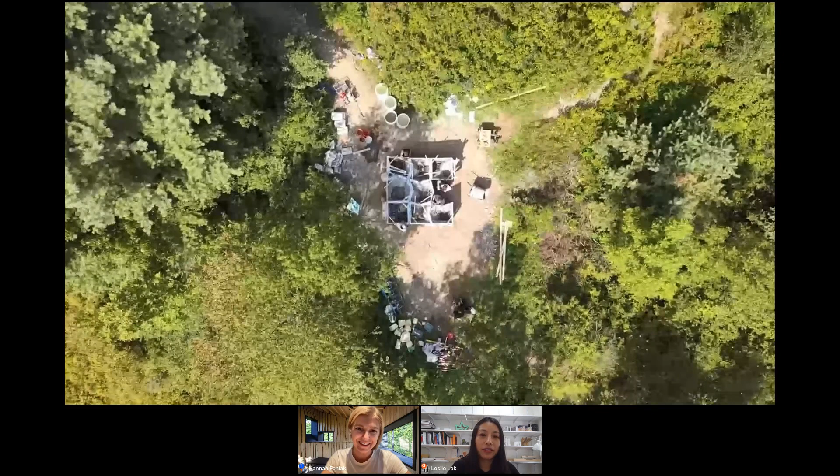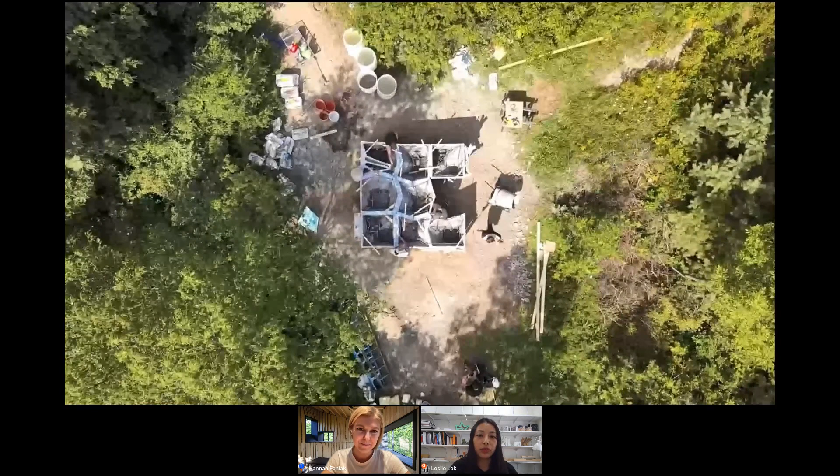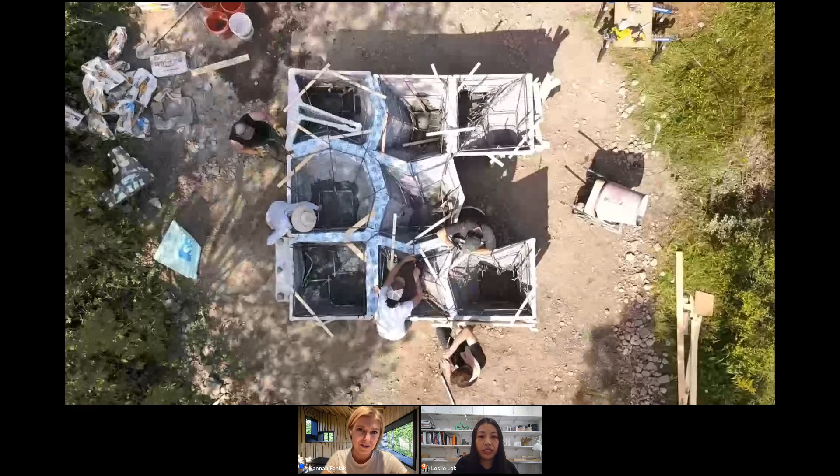So at Hannah, we believe that the issues of making and forming are fundamental to how we operate as designers. And the various projects presented today will seek to inform form through a variety of methods of production. They range from digital fabrication technologies that facilitate new material methods to also a combination of conventional methods as well, to think about tectonic articulation, environmental practices, technological affordances, and different forms of construction.

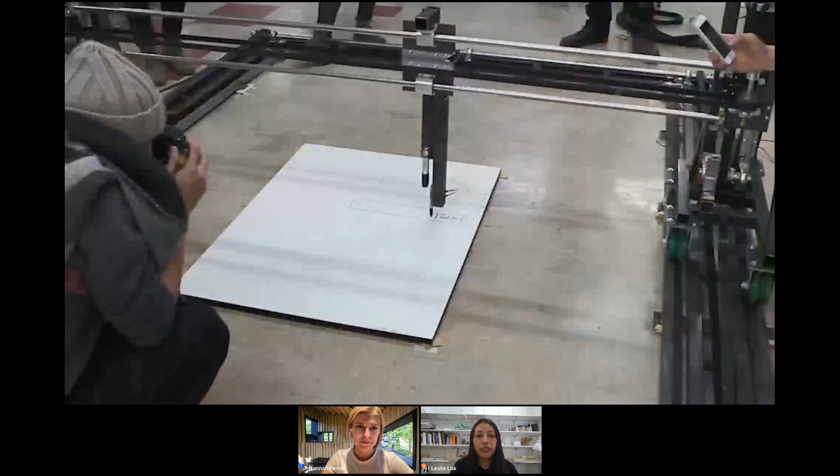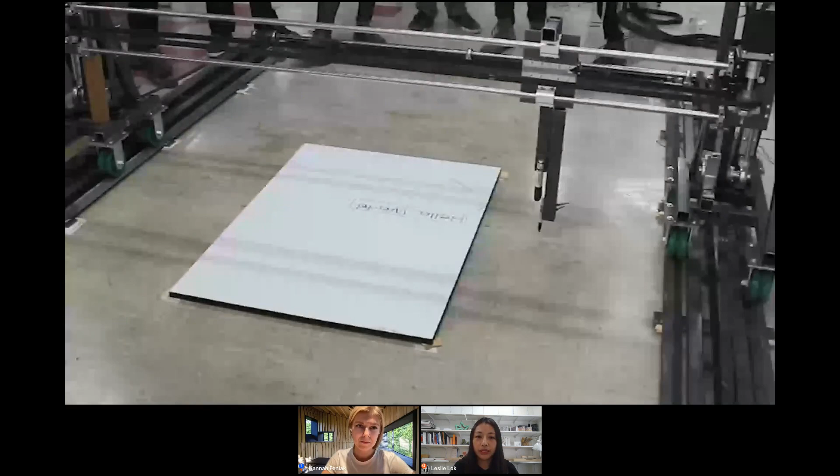And so in the past few years, we've created open source construction machines, which we argue inevitably affect how we think and design through making. And in our work, as mentioned in the introduction, we really seek to mind the tension between the machine means and the architectural ends across scales. And so to think about how our tools and our processes can influence the way we can build, but also ought to build in the future.

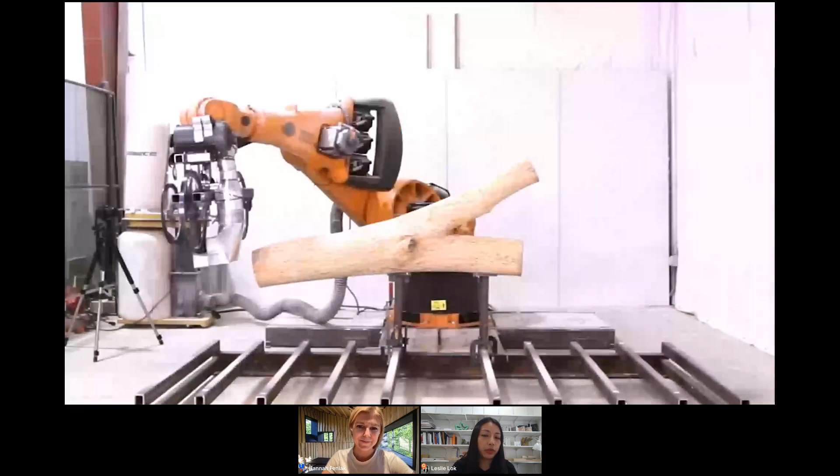And by developing our tools in the past several years, we built an infrastructure and framework for architectural explorations, starting from the design of the tools itself to prototypes, installation, and to small buildings, and next step, current step, into a larger building. And just like this video here, like the robot and the animation, we have been trying to unlog our own architectural preconceptions and expectations.

So there are certain concerns that drive our work that are architectural, spatial, material, environmental, and technological. And for our talk today, I would like to use the concept of unlogging to unpack some of these concerns and their conceptual entanglements. A log is both a part of a tree and also an official record of events through a voyage of a ship or aircraft. New material and design practices are needed to address climate change as one of the most pressing problems of our generation.

So moving forward, designers and researchers need to develop new logbooks, log new design protocols, and fundamentally unlog our past loggings in order to move towards more radically sustainable and less wasteful building processes. And one of the main environmental narratives that we've been engaging in the past several years is actually with this tiny little bug called the Emerald Ash Borer.

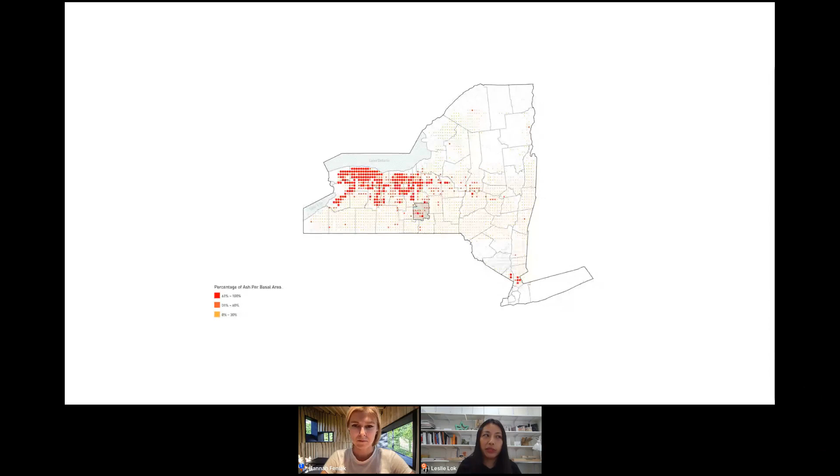And as a reference, we're based in upstate New York, and almost every 10th tree in New York State is an ash tree. So every 10th tree we see will be eliminated, felled, or destroyed by this EAB epidemic. And so while we as designers cannot help the dying trees, we do believe that the infested wood forms an enormous and untapped material resource for sustainable wood construction.

This problem really came to our attention when the EAB arrived at Cornell, at our doorstep, in 2018. And it has since become our own source of what we call morbidly sustainable material. And this is one of the infested logs that we used in one of the projects I'm showing today. And you can see the markings created by the beetle larvae between the wood and the bark.

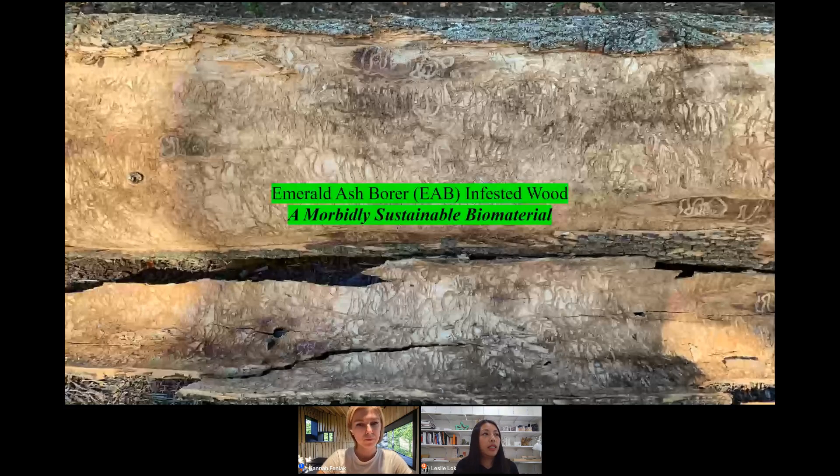And so the first project is called Unlog. It's curated by Katie MacDonald and Kyle Schumann from UVA, and it was commissioned as part of the Bio-Building Material Exposition. In this project, Unlog questions current paradigms of timber framing by working with local forest resources and trees that are devastated by the ongoing Emerald Ash Borer epidemic.

One of our audience here, Rafi, is from UVA, so he saw it in person.

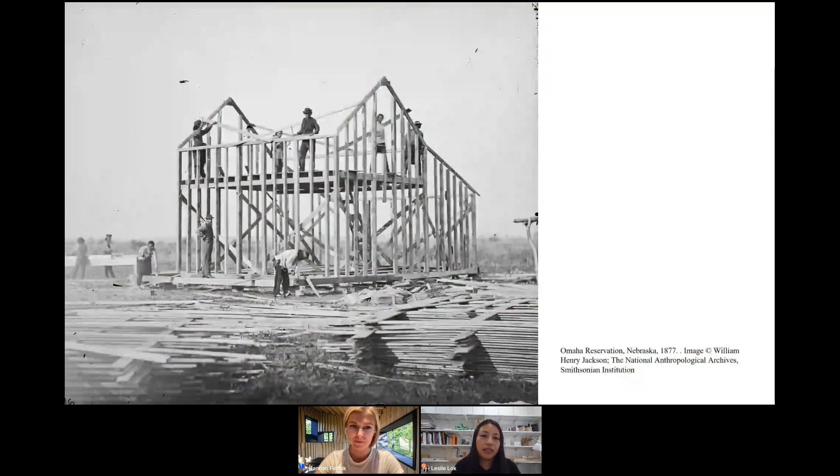And the departure point of thinking about contextualizing framing as a technique is that in the US, or in North America, wood framing is a quintessential expression of the construction and culture. Today, over 90% of new residential buildings in the United States are made from fast-growing softwood timber that is first milled into dimensional lumber, such as 2x4s, and then assembled into wood frame buildings.

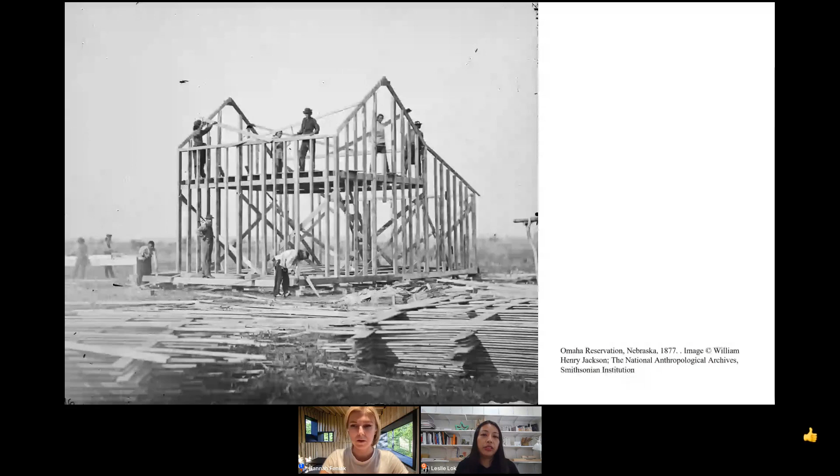So for us, we ask, can we make this method of construction more materially efficient? Can we use these decaying hardwoods to rethink framing techniques? And so here, the logs used in the Unlog essentially unfold from a line to a surface, loosely referencing and reinterpreting the tradition of wood framing.

This drawing shows the log utilization comparison of conventional framing, where you see the 3 logs and the 2x4s that are extracted from them to produce a frame wall, versus the strategy of actually kerfing a log, splitting it in half, kerfing, and then stretching it to create a panel.

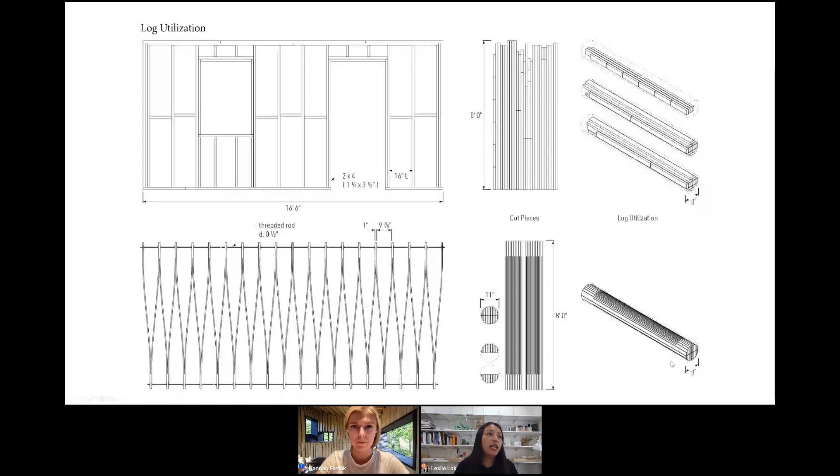It's also important to note our practice research is also linked to our teaching sometimes, and the full log kerfing method was developed by one of our previous students, Savannah Chazen-Hogg, in the Timber Villa Option Studio at Cornell in 2017. So from there we developed a comprehensive method for this full log kerfing.

More broadly speaking, kerfing is a relief cut technique that induces flexibility into material and is often applied to sheet material to generate curvature. What we're doing here is using kerfing in a different capacity by kerfing along the length of the log. This diagram shows how when you cut in an alternating pattern, we are able to unravel the volumetric round wood into an operable leaf spring component.

Here's the diagram illustrating the geometric relations between the uncut margin depth and the component transformation. So by determining how much we kerf, we can begin to calibrate the density, flexibility, and stretchability of the component.

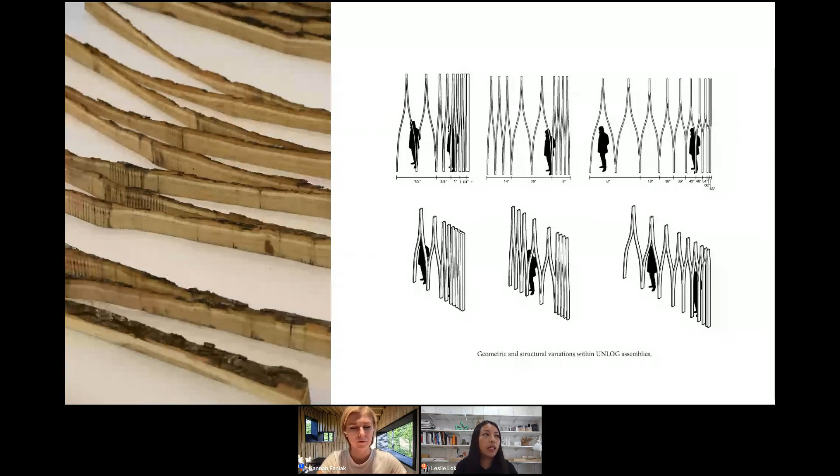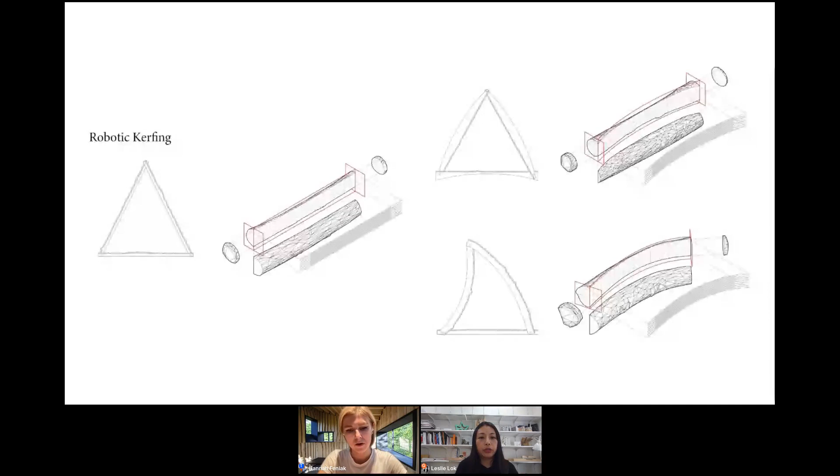The zigzagging logs can also be used to create braced structures, and according to the natural geometry of the log, by using robotic kerfing, we can also reflect that curvature in the kerfing pattern. That way we can not only kerf straight logs, but also curved logs. The structure is partially inhabitable, and we reveal the unique wood grain and profile of each log.

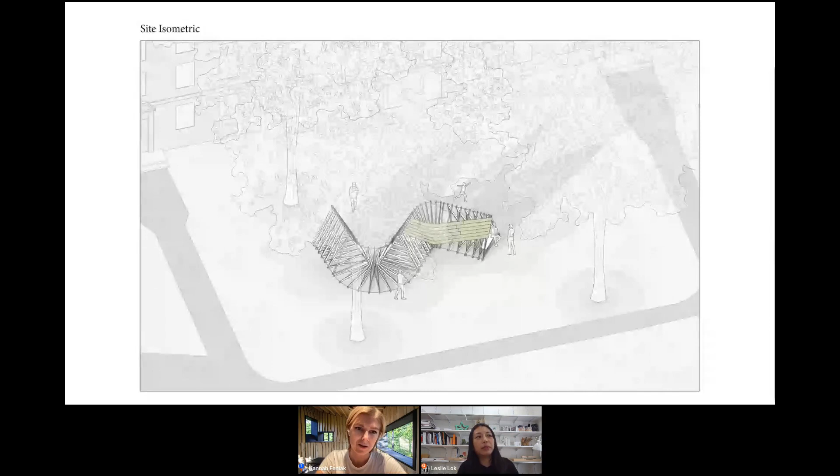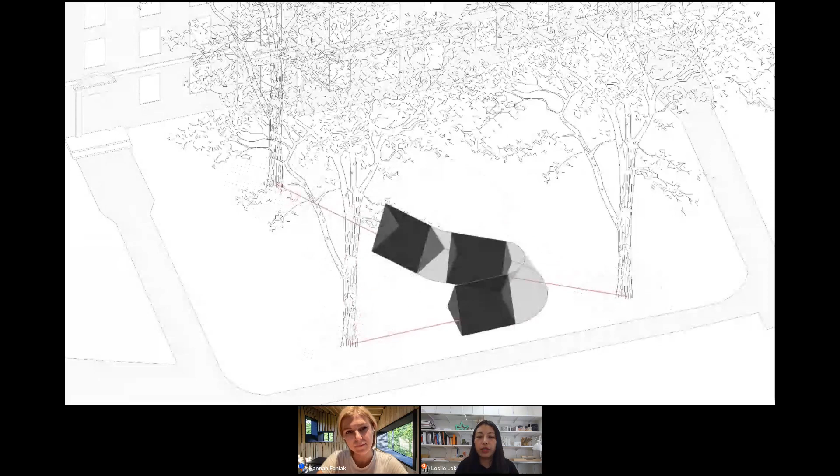Here's the axon that shows the structure sitting within the site. We actually have quite an amazing site with 3 huge trees. When we first approached the design problem, we were thinking, how do we orient the structure within the context? The idea is that the 3 individual A-frames can each be oriented towards one tree to frame a view. Here is a script that we developed to explore the various spatial configurations.

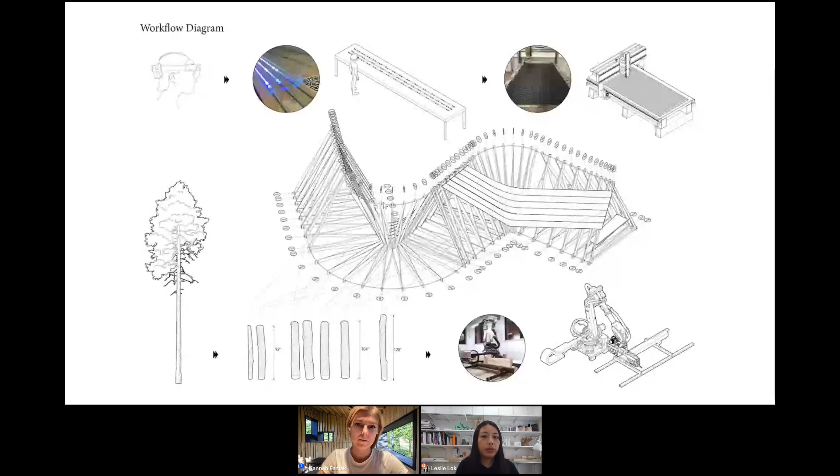We also utilize augmented reality to help us position the nut locations on the threaded rod. These are all ways to facilitate the fabrication process. Here is a drawing that illustrates some of the structural analysis that we did with Karamba 3D. In the simulation, we found the bending-active A-frame to have significant structural viability with just a few millimeters of displacement.

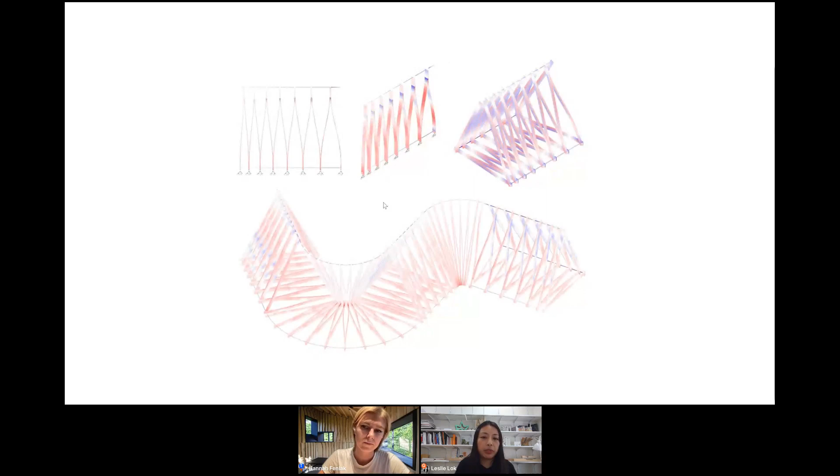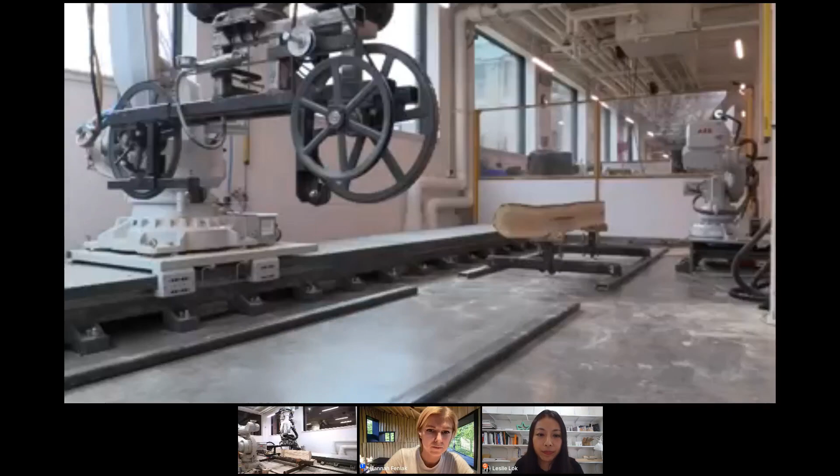Here you can see it's also a human-machine interaction, where after each cut we put a wood block to allow the blade to retract itself, and then it goes on and cuts the other side. So back to the presentation.

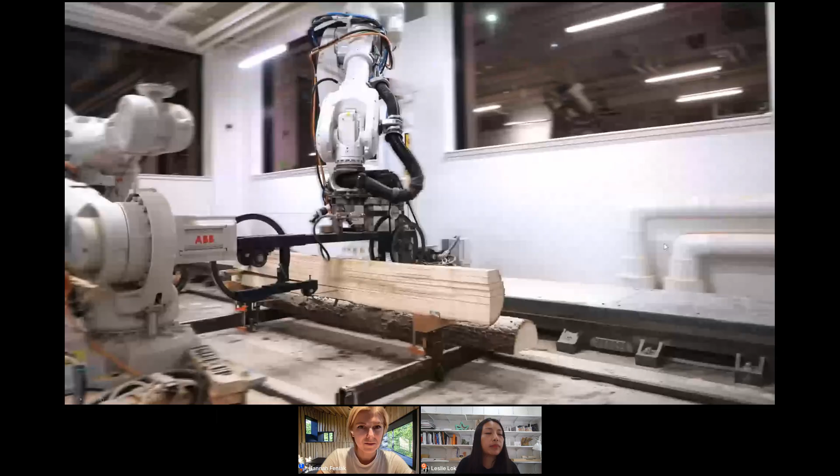So through this prototype, so we first developed a full-scale prototype. We were able to understand some of the larger misalignments between the digital and the physical model. And so this physical mock-up was then modified to accommodate some of this unforeseen bending. And then the digital model was updated accordingly. So we used a full-scale mock-up to learn from some of the behavior.

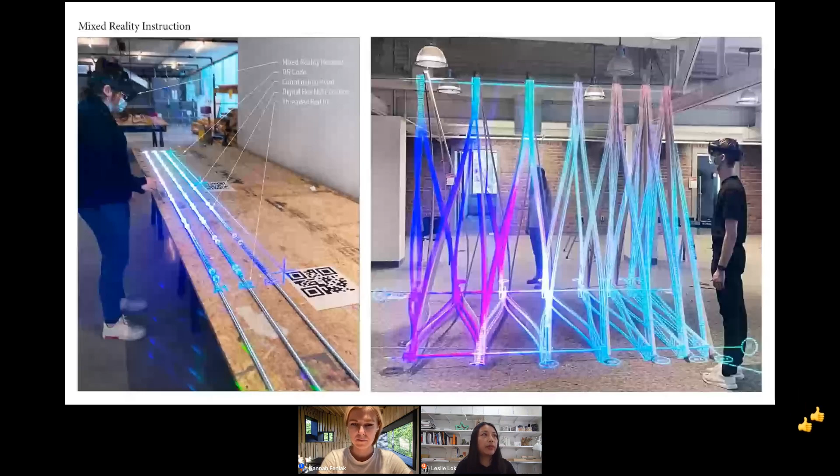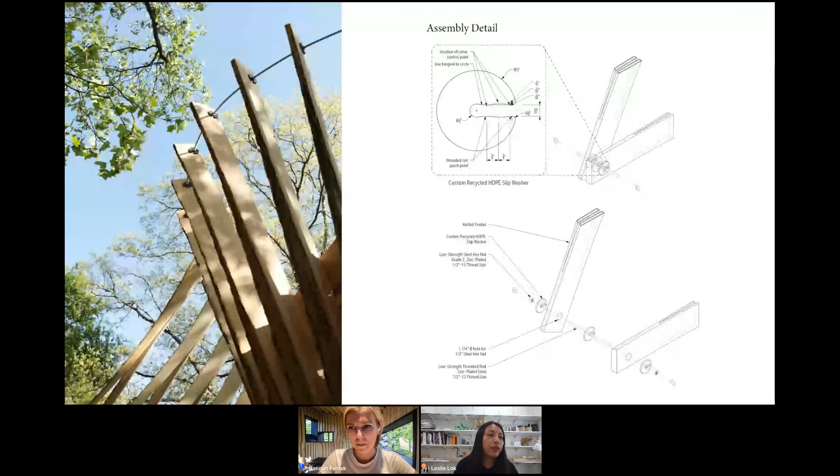For this project, we also developed some fairly simple assembly details that help us to put together the structure on site. So here it shows the slip washer with the threaded rod and how they connect together with the curved logs. And here's a top view to show, again, the sort of thinness of the bent threaded rod threading the curved log together.

What we discovered also that is really interesting in this project is the sort of material tectonics that begins to emerge from the really precise, clean cut side of the log to the other side where the natural bark remains. And then the photo on the left is the really thin, these are 2 millimeter thick sheathing that we robotically sliced from the remaining ash logs that we have left. And then they serve as the sheathing of the structure.

So after the Unlog installation, we decided to explore how we can develop a follow-up investigation and use the Unlog method differently. And so in this new project, currently called the Unlog Tower, we translate the horizontally connected structure into a vertically stacked tower. It is an interdisciplinary collaboration with our other Cornell colleagues, Kurt Jordan from anthropology and Matthew Reiter from structural engineering. Using this technique, the unfolded panels can now be assembled vertically into a tower that sits in the center of the Arts Quad on the Cornell campus.

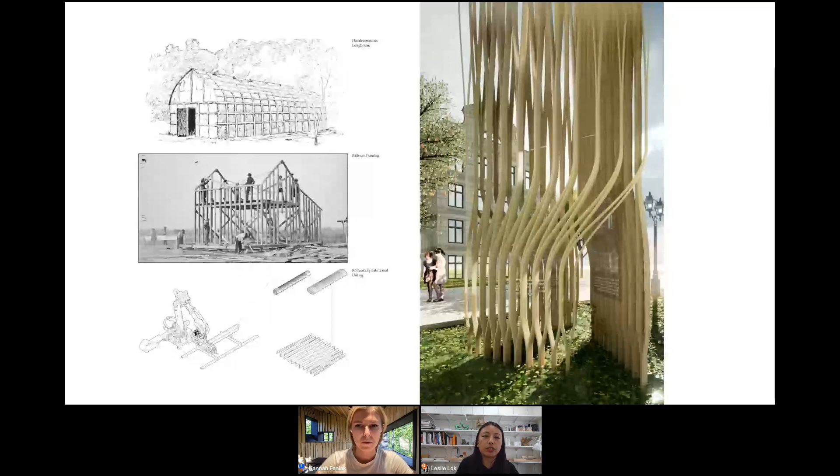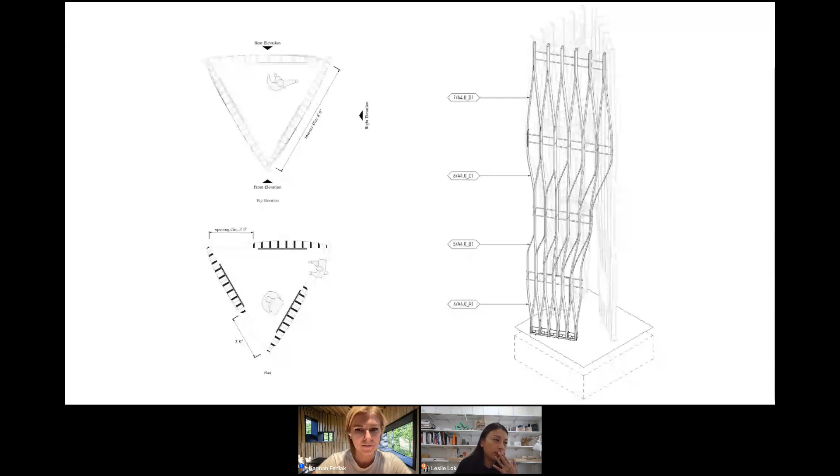And so here it shows the plan diagram on the left, where it's an occupiable space at the base with 3 entrances. And then the drawing on the right shows how it's made up of various tiers. So the tower is constructed of 4 tiers, and it will be 36 feet in height with an accessible base area of 30 square feet. So the tower explores similar material tectonics in a new structural form, and the multi-level structure brought on new challenges, as I've mentioned.

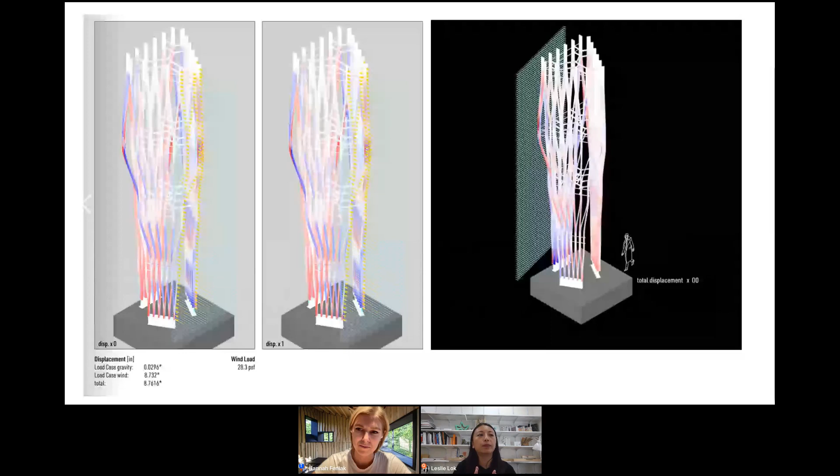Structural simulations using computational tools were developed to test the wind load, displacement, as well as how to geometrically optimize the transformation of the panel from top to bottom. So you can see in this diagram here that the woods are much denser and closer together in order to accommodate the 3 openings. And it then starts to expand in width, then to full width as it moves to the 4th tier.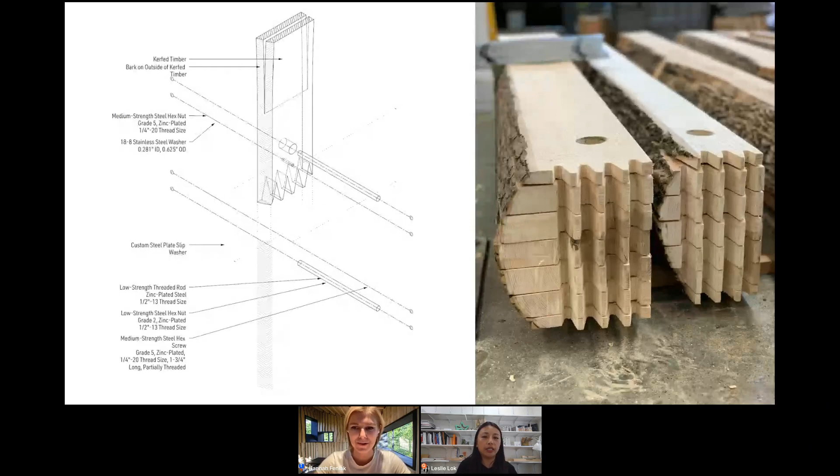Again, new connection details were developed, and in this project, we developed finger joints between the panels to resist lateral movement. And here are some photos of one of the panels of tier 4 being stretched out, and some of the hardware; similarly, again, slip washers, except this time a much bigger washer to connect the various tiers.

So apart from the robotic kerfing, one of the research investigations we developed for this tower is looking at how augmented reality and mixed reality can help us better facilitate the fabrication and assembly of a tower like this, where it involves, again, non-uniform parts, but also non-uniform spacings. And it is primarily divided into 3 steps.

The first is cataloging, meaning the positioning of the physical log that we're using. Second is the positioning of the log and the kerf patterns. And third is identifying objects using gestural feedback. And I will show some video clips that explain some of these processes.

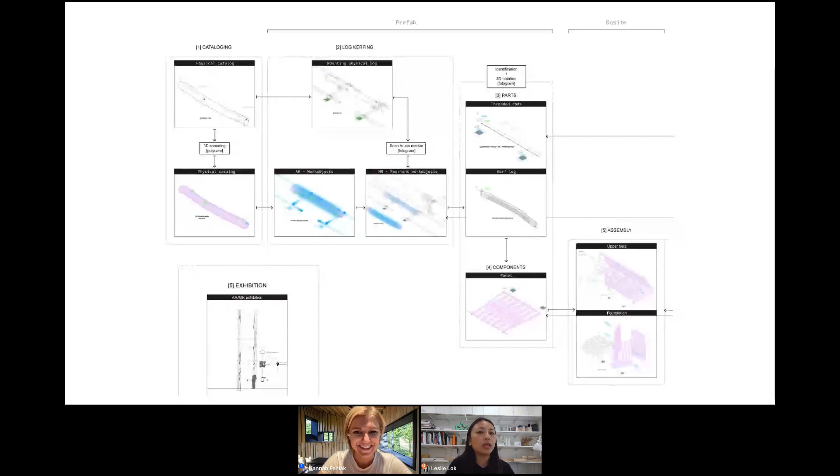So the first step in the workflow is actually the simple basic step of mounting the log, positioning it for robotic cutting. But a log is not fully symmetrical and it's non-uniform in nature. So this makes this simple task rather complex because the positioning of the physical log would have to be the same as the digital twin that we're slicing.

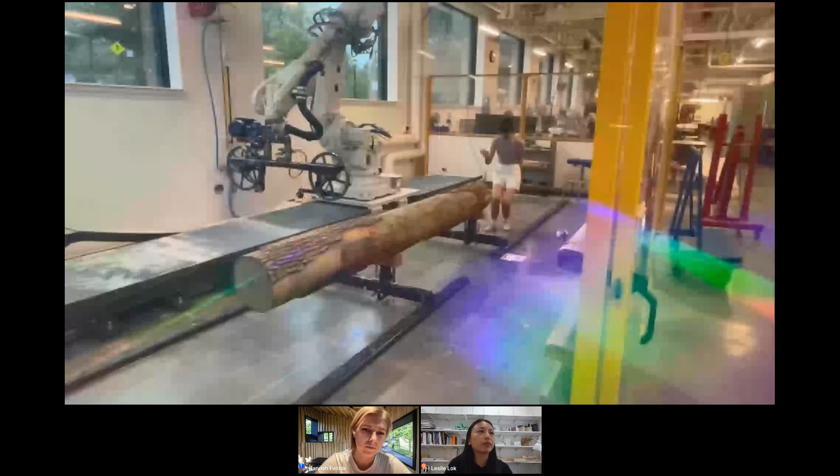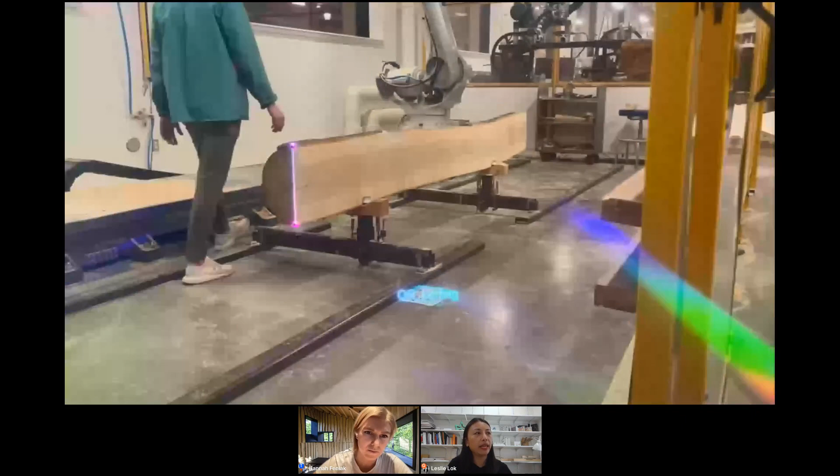And so in this video, you see that with a fairly straight log, we just need to identify 3 points that would then generate the location of where the log is and how it's oriented on the mount for kerfing. And then second, we cut the log in half. And again, using gestural recognition here, we're able to see the kerfing patterns to check if anything is out of bound of the log.

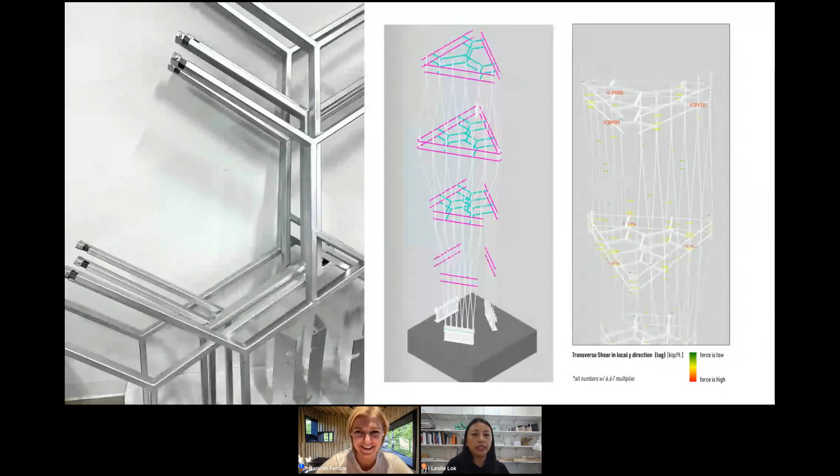And apart from the log panels, the project uses 6 steel tube frames in the different sections to lock the 3 facades in place. And each frame is slightly different in dimensions. That means we have a selection of steel tubes that are also in different dimensions.

And so again, with gestural recognition, we could touch the 2 ends of the steel tube and it will identify the corresponding component within the frame itself, as well as which tier it is. So essentially, we're using this to help us index our components and parts.

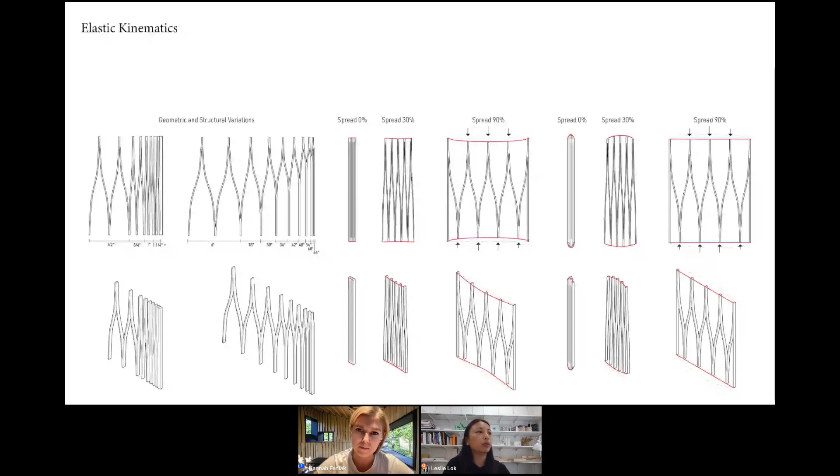And then back to the stretching of the log a little bit more. In terms of the geometric variation, the stretching pattern of the log also determines the cut length. So you can see in this diagram here, the more one spreads, the more varied the length of each of the segments will be. So when you have a uniform, symmetrical stretching, like the panel on the left, all their lengths are fairly the same.

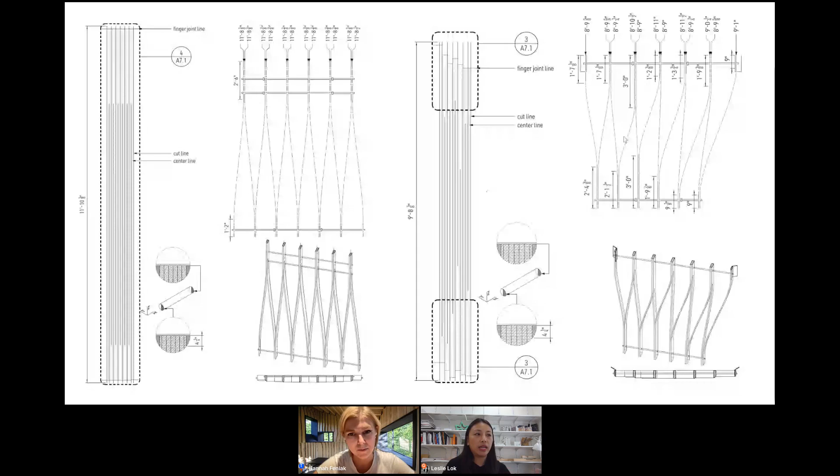But if you see the panel on the right where the stretching is asymmetrical, the kerfing distance actually varies from one kerf to the next. And therefore, there's an implication on our finger joints. So using similar gesture recognition, we are able to identify the edge of it, and it will tell us where we need to mark and cut the finger joints for each layer.

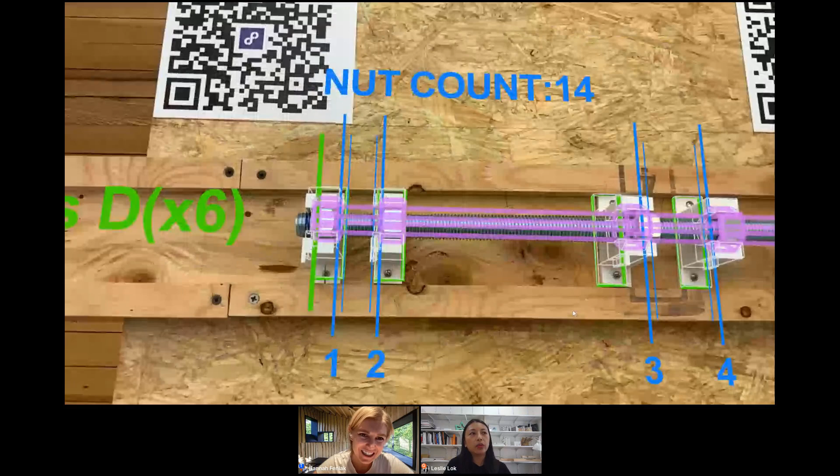And so here are some of the examples of the logs that we cut. Here, again, similar to Unlog, we use AR to help us determine where the location of the nuts are. And that all facilitates the process quite well.

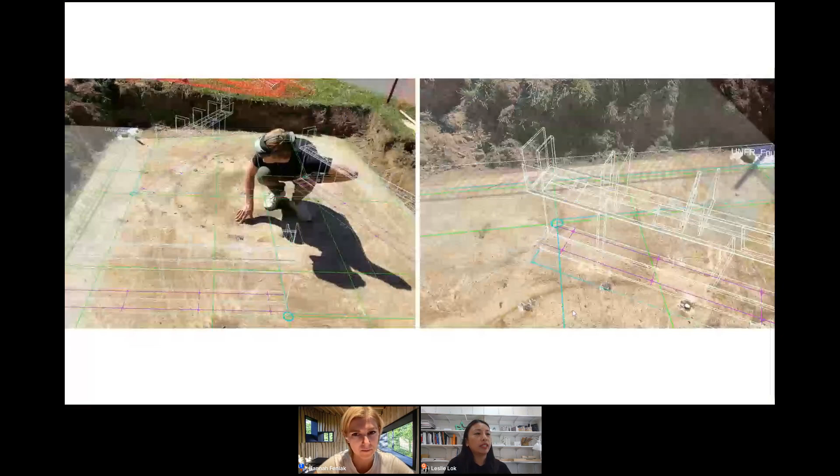And then when it comes to the installation of the foundation, we're using an existing foundation pad where there are previous steel rods from the last installation. And the AR helps us check if there's collision and overlap between the steel rods that we need to drill for our tower versus the prior installation. So that was a very helpful tool to allow us to double check all that information.

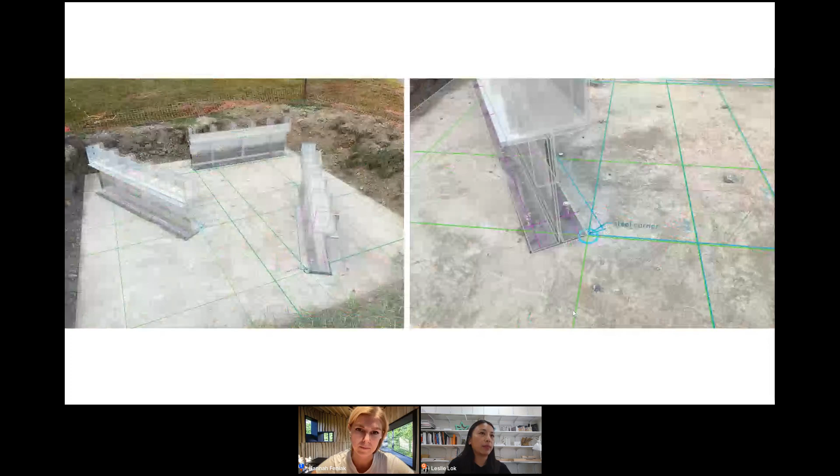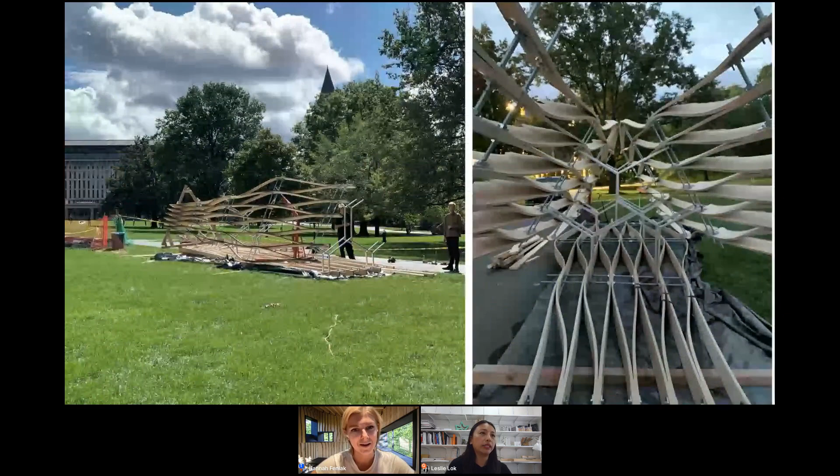And so here it shows the tower now with the panels being assembled together on site. What we do is we connect the 4 tiers of each side first, and then they are put together on site here, as you can see. So we're assembling the tower horizontally, and here's an interior view of it. This would be the view of what you see when you look up the tower after it's lifted.

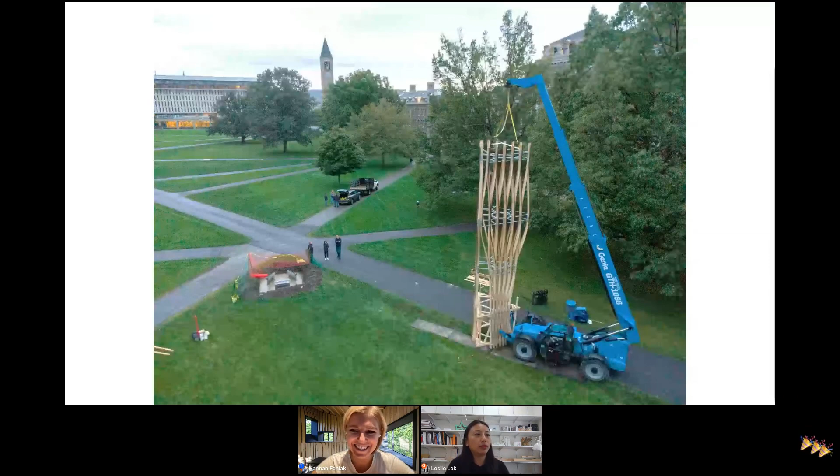And this is fresh out of the oven. Actually, we just lifted the tower this morning, and here it shows the crane rotating the horizontal tower vertically and about to lift it and move it in place to the foundation beams on the left of the image.

So I will use this image to summarize the last 2 projects. From Unlog and Back to the Log, it illustrates the potentials of new tectonic strategies and sustainable construction methods. I would say in both a very rigorous but also playful manner, our work seeks to leverage technological advancements to reduce material waste and encourages a nose-to-tail usage of logs and timber.

And so I'll move to the next project, which is the Ashen cabin that some of you might be familiar with. The Ashen cabin was a project that was developed in 2017 and completed in 2019. In a way, it's an accumulation of some of our research agendas, where it combines both 3D printing and the wood explorations of using waste wood devastated by the Emerald Ash Borer.

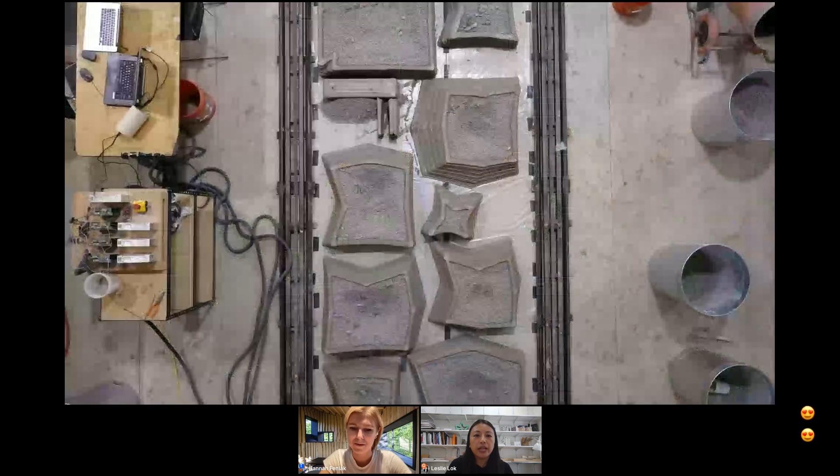So informed by these two material narratives, it is a small building made of a 3D printed concrete base structure and a robotically fabricated timber envelope. In the first material system, the Ashen cabin explored how the horizontal layering of concrete and the act of corbelling can suggest new strategies for building.

The concrete structure is printed in components, as you can see in this top view here. And they serve as a sacrificial zero waste formwork for the main structure. So formwork is printed in small sectional modules to be transported and then assembled manually at the remote construction site.

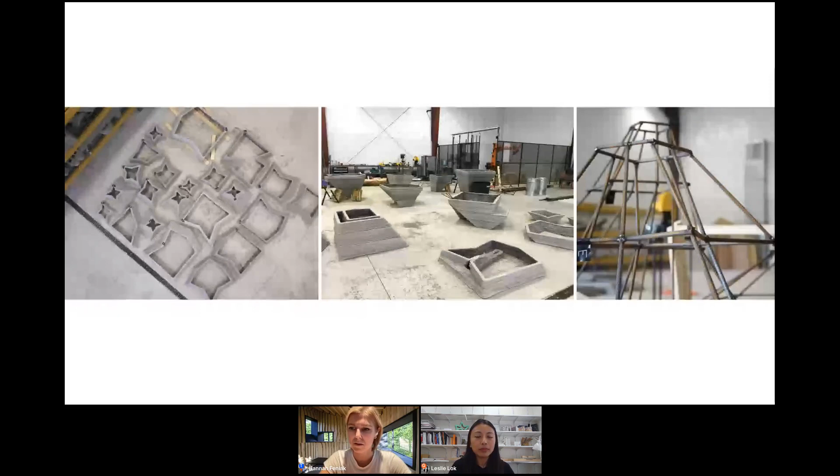And so while the concrete parts can be mass customized with relative ease, as you can see on the left, the subsequent fabrication of the rebar cages does increase in complexity, which required a substantial amount to fabricate. So just to demonstrate that there's upside, but also certain aspects that still need to be done manually. And so here it shows the concrete components on site.

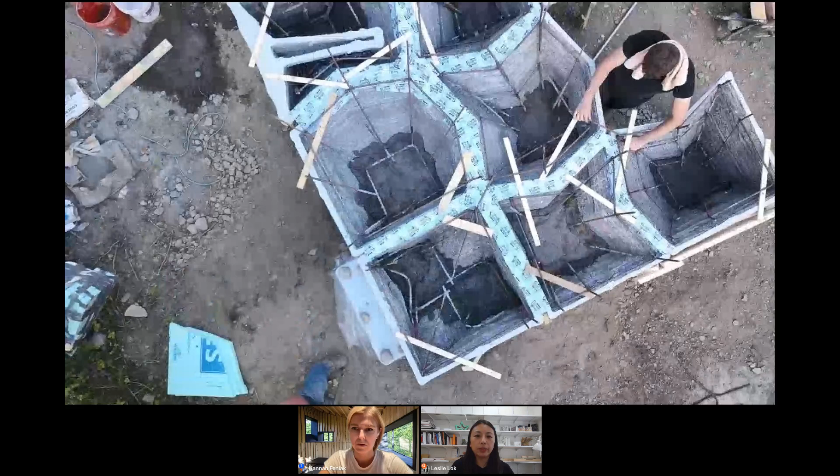For the project, we developed a hybrid construction system with 3D printed formwork and cast in place concrete with custom rebar. Each leg is then filled with foam, and within the void between the legs and the foam, concrete is poured to form the main structure. So here you see the structure going up. We're assembling the chimney there.

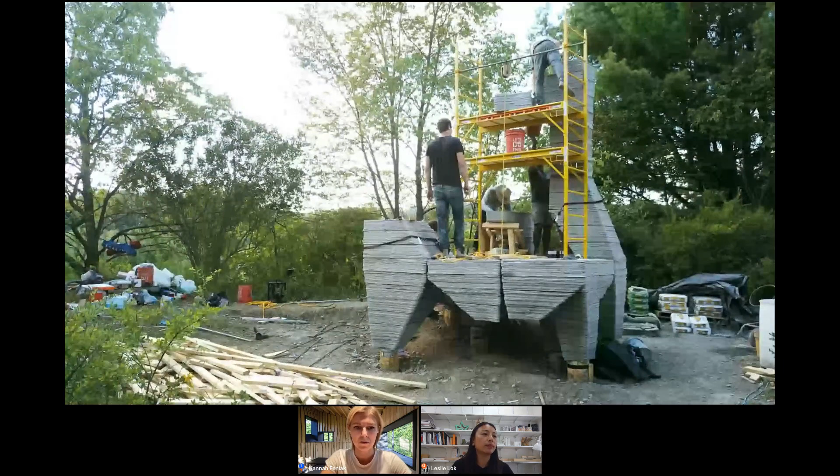And the slabs are organized in a 9-square grid, reflecting the interlocking pattern of the legs beneath. In this hybrid building process, tectonic expression is generated by fabrication method and its materiality. So for example, what you see here is the floor tile, and the G-code, which is the print path, becomes visible as the ornamental pattern of the 3D printed floor slabs.

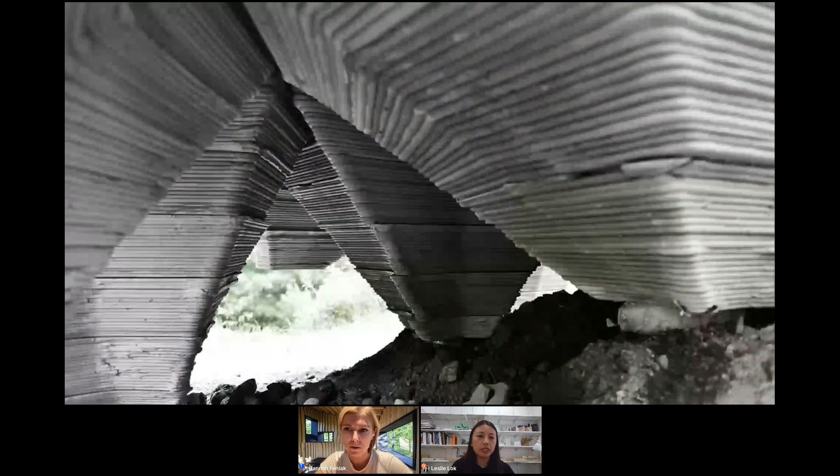And corbelling is achieved through sectional transformation and becomes an expressive and functional motif, which allows the horizontal layers to seamlessly transition from the leg to the slab and then to the chimney above. The resulting concrete structure lifts off the ground and is characterized by 3 programmatic areas. That was when we just finished printing: a table, a storage seat element, and a 7-meter tall fireplace.

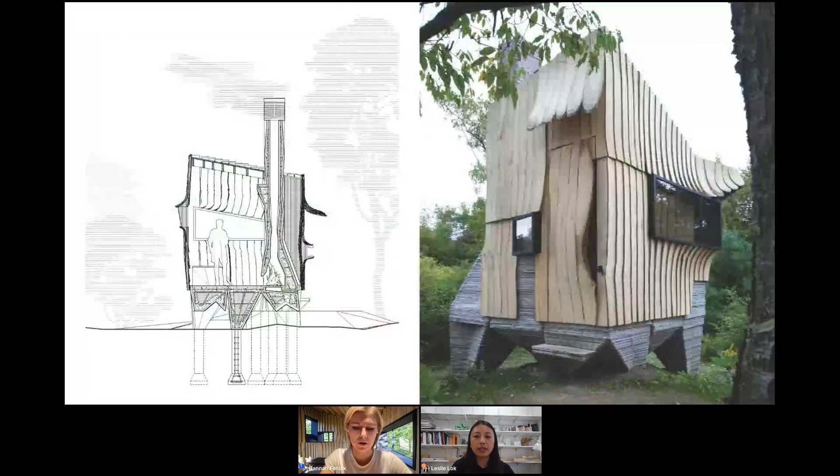Due to their geometries, many infested ash trees cannot be processed by regular sawmills and are regarded as unsuitable for construction. So, challenging preconceived notions about material standards in wood, the cabin utilizes infested trees for its envelope, which unfortunately are widely considered as waste or used as firewood.

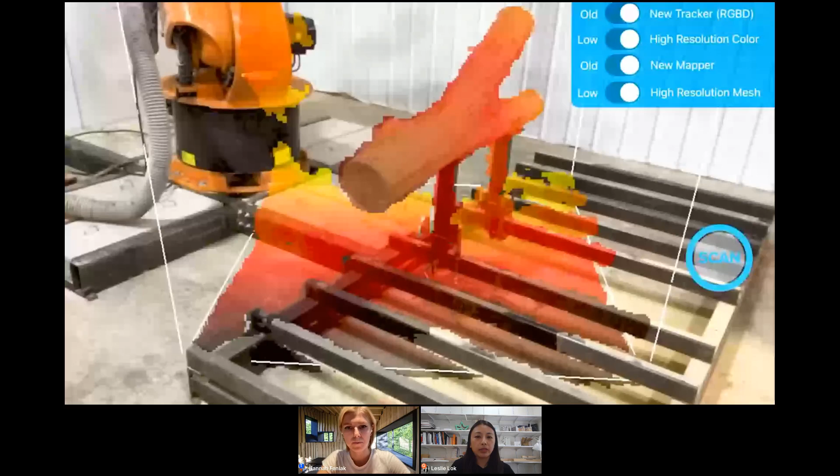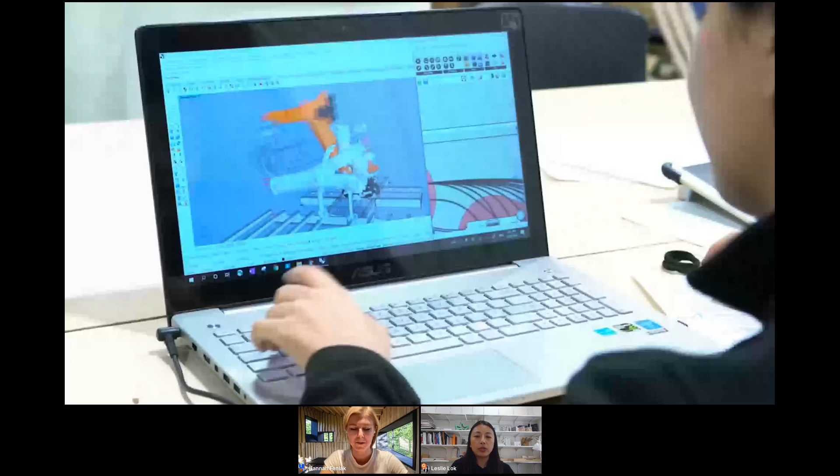For that project, we developed a process that involved 3D scanning and our custom robotic platform, where we can transform these irregularly shaped waste wood into an abundantly available, affordable, and sustainable material for the Anthropocene. With this method, we can slice these irregular tree logs into naturally curved boards and strategically assemble the boards to form different surface conditions. Ironically, to achieve advanced environmental resiliency through architecture, our resources themselves are sometimes not resilient enough.

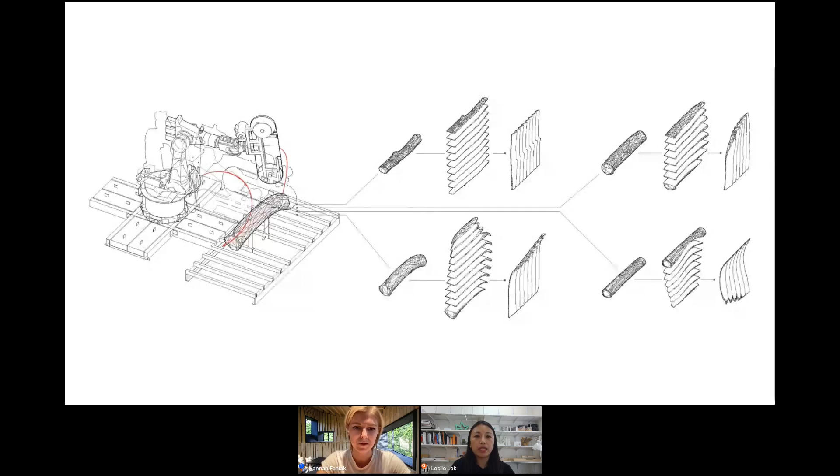By adjusting the thickness of each cut, the robotically carved boards can be assembled into single curvature or double curvature surfaces. Here's an example between the form finding process of the log and the final assembly. So there is a sort of feedback back and forth between the building design and the logs that they come from.

You can see here in this image where the logs are sliced with varying thicknesses. Then the sliced boards are arrayed into interlocking SIP facade panels. SIP is structurally insulated panel. And you can see here the interior elements are more straight and the exterior elements are more curved depending on the logs, and then there's spray foam in between.

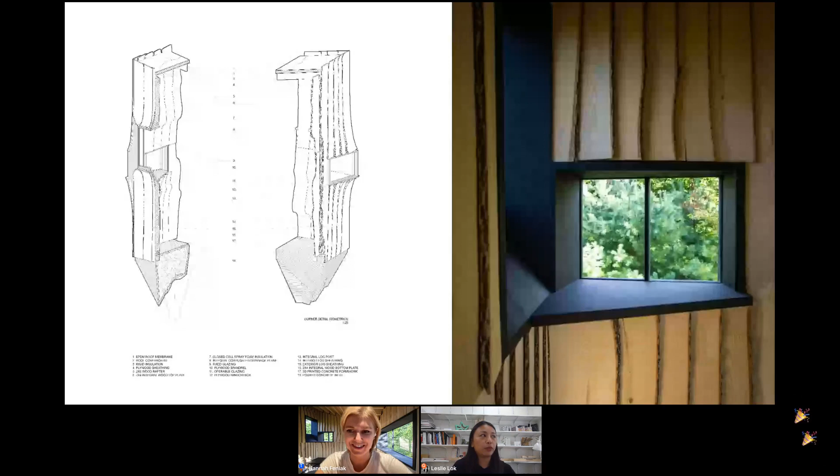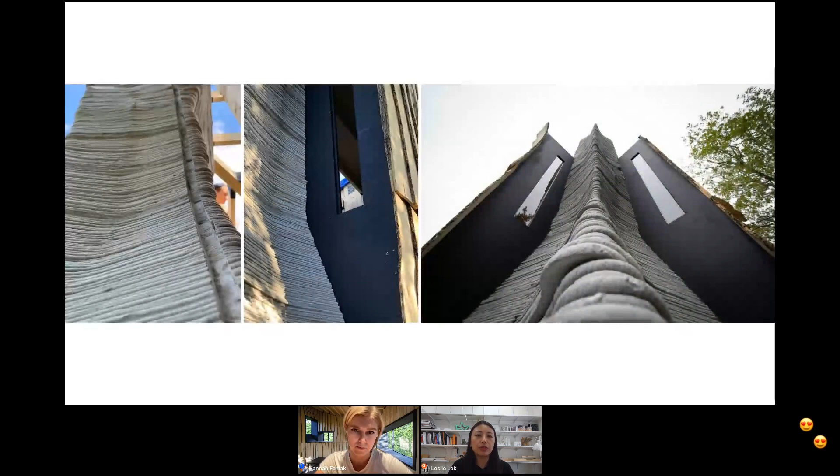So for us, certain disciplinary problems, questions of joinery, material connections, proportion, and performance begin to infuse our discussion. Here, the facade assembly is a corner moment of how we decided to turn a corner to negotiate the different curvature of the log. The facade assembly is fully ventilated, detailed to manage shrinkage, and does not require an additional rain screen.

So the end result of this constant negotiation is an unfamiliar hybrid between digital and anachronistic processes of construction. We think that architecturally, the Ashen cabin walks the fine line between familiar and unfamiliar, between technologically advanced and formally elemental. And as mentioned, on the inside, we use predominantly straight ash tree sections to create a contrast between the exterior and interior.

So for us, when we were working on this cabin, the project in a way was no longer bound to the paradigm of timber standardization. And the project revisits woodcraft and design based on organic, found, and living materials. While transformed after sliced, the natural tree remains legible in the design. So at certain views, the log actually began to reconstitute itself.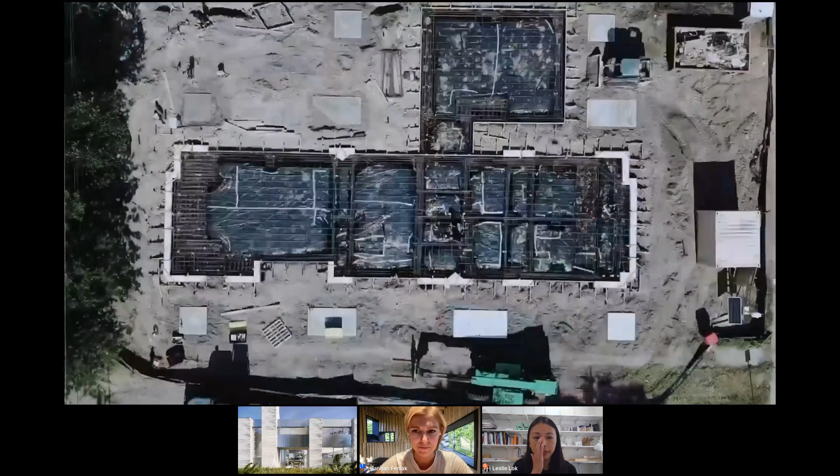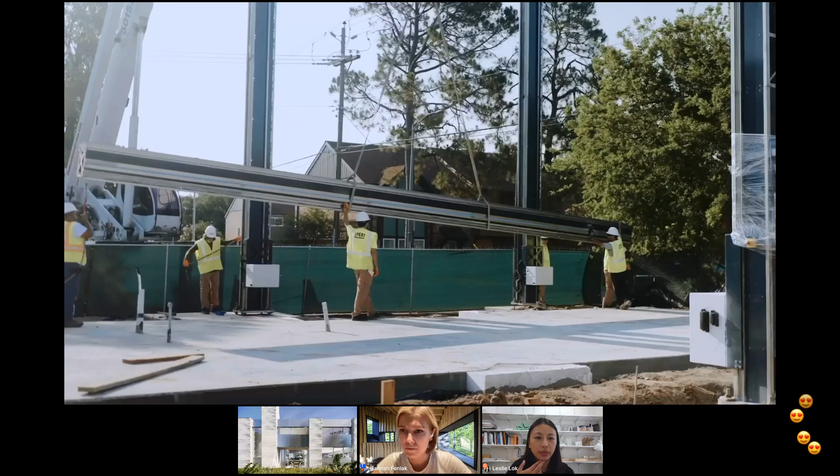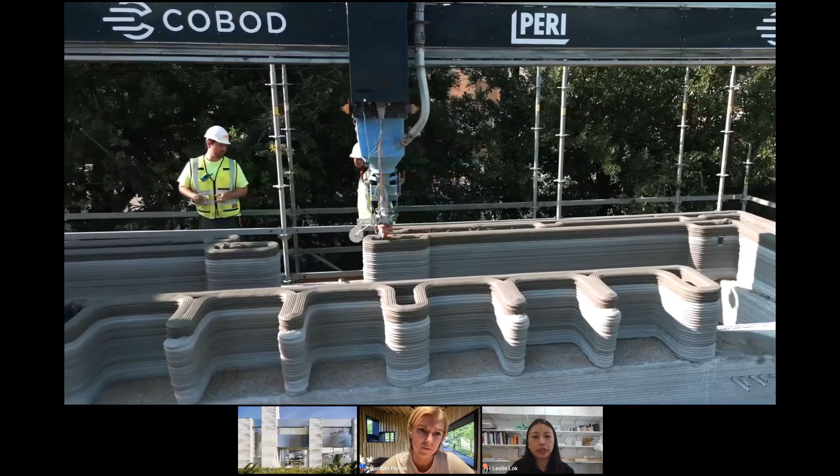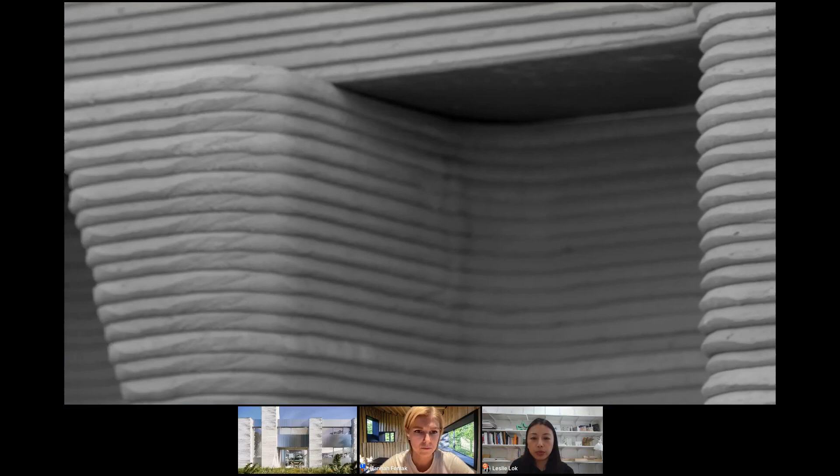So what's unique about this project is that it is the first 2-story 3D printed building in the US. And the goal for our team, as I mentioned, is to think about how we can develop the sort of modular aspect. And so you can see it's actually a fairly linear site. And here's PERI using their COBOD BOD2 modular printer, which allows us to not only go in length, but also in height to 3D print a multi-story condition.

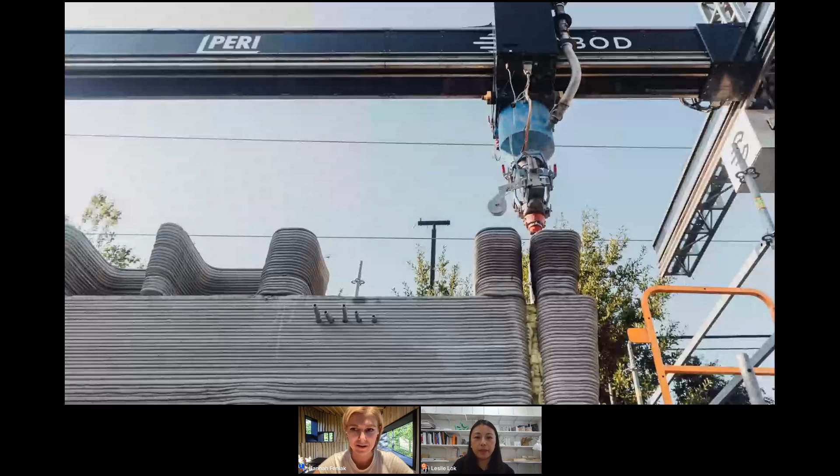And so the design used a hybrid construction system, meaning that it pairs 3D printing with wood framing, making it one of the first 3D printed buildings to use wood framing in an integrative manner. And it is a 4,000 square foot project that showcased the possibility of 3D printing technology, its benefits of mass customization and design solutions that come with this method. So we'll return back to the images.

And so the project also developed detailed solutions with some of our key building industry partners, from the construction material to HVAC system. So for example, in this project, we are using Quikrete's new generation of their specially formulated 3D printable concrete. And in the mixtures, similar to conventional concrete, we can integrate fly ash and other waste material to reduce the carbon footprint of the material mixture.

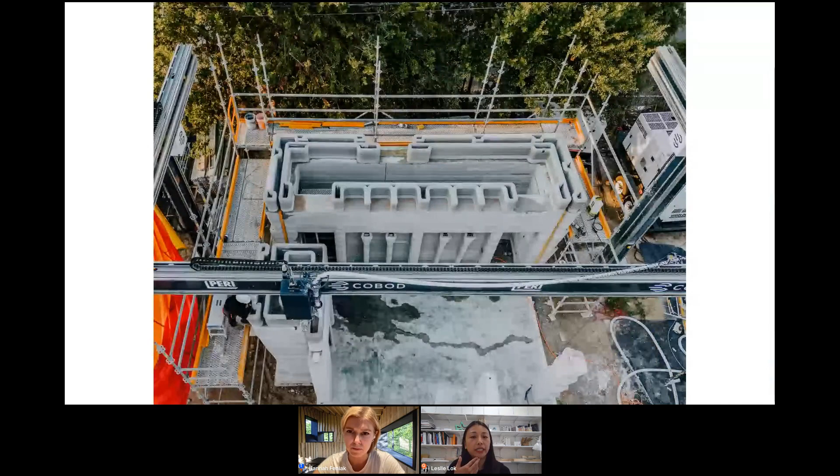We also work with Huntsman Building Solutions and their R&D team to integrate their closed cell spray foam product for the printed walls. And so here's an image where you see we're printing on top, and then the bottom section has been spray foamed. And along with that, there are also questions about connections and details. And so we're partnering with Simpson Strong-Tie, using some of their connection products to connect the 3D printed elements with our wood connections.

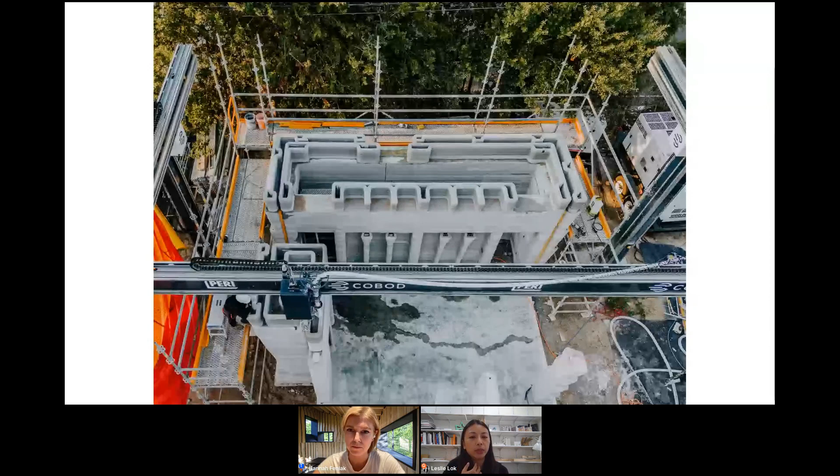In terms of HVAC system, we're actually using Toshiba Carrier's VRF, which is called variable refrigerant flow technology, that is more common for commercial application. And we're using this in a residential context because it allows each section of the building or the rooms or space to have their own control, so that when it does get scaled up to multifamily housing, the integration of the HVAC system is also ready for multiple units.

And so given that it's a 2-story building, with the structural engineering expertise from our local GC, CIVE, our team was able to develop an approach to printing the second floor. And so you can see in this image that this section here is actually where we cast ring beams, which allow us to continue to print on the second floor.

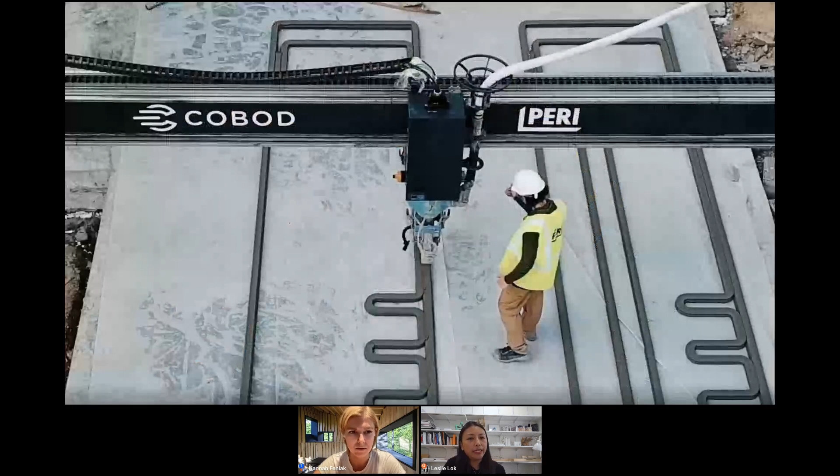And also the project highlights some of the exciting design potential for mass customization. And so for us to start designing, it was very important to understand the particular material mixture, how it behaves on site with this particular printing system that COBOD has.

So we started on site by doing a series of test prints, testing different radii and how to turn, the tightness of turning corners, to find the optimal dimension and so on and so forth. So actually this is from one of the first test prints that we did to identify what turning radius is most suitable for our particular context.

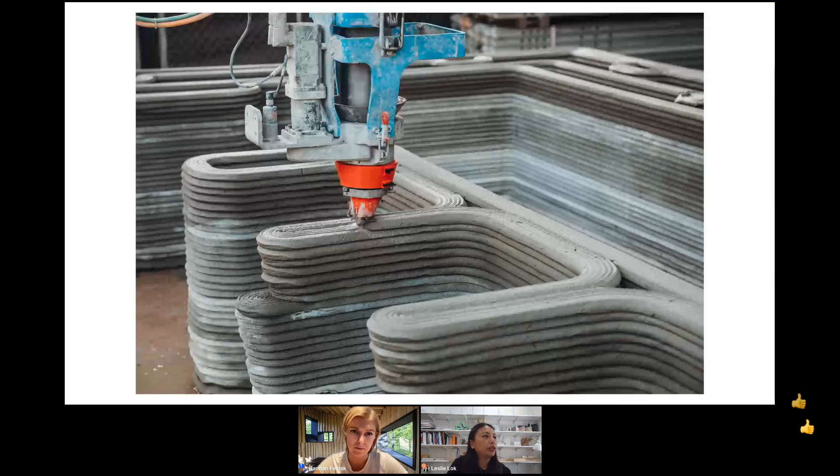And here you see the first section, the printing starting to go up, and the corbelling, the sort of incremental cantilever, again, is used as a design motif in here, where at a larger scale, it translates into these various levels of ledges, not only as an architectural motif, kind of an ornamental aspect, but it also helps to break down the volume of the printed mass.

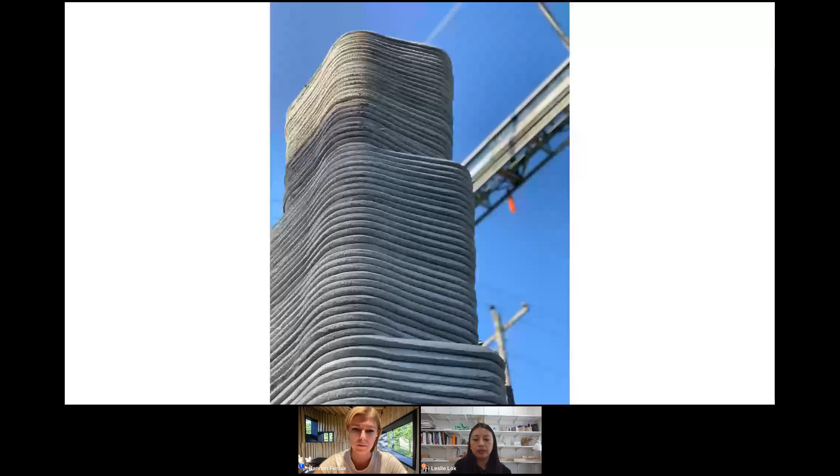So here is a view looking into what would be the living room, which will be a wall of customized shelving that we're developing here, and the same pattern would move up into the second story. And some photos to show the detail of some of the printing, how the ledges and the offsetting is repeated not only on the interior of the building, but also on the exterior of the building.